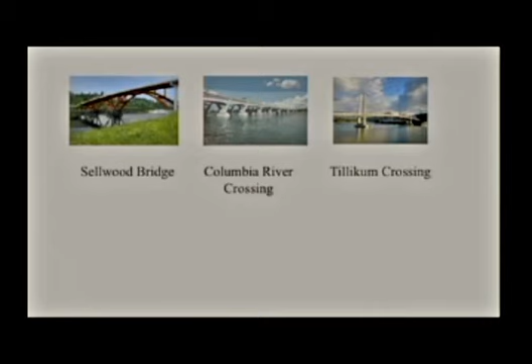The first and largest is the Columbia River Crossing. This was a study project initiated shortly before I took office on the Metro Council. Most of the references I'll make are to the final environmental impact statement, although this project went on so long and developed so many variants that you can find a variety of cost estimates or project descriptions. So I'll focus on the locally preferred alternative, or the LPA, and everything I say is documented one way or another in the voluminous library for the project.

What was the project? Well, contrary to the title Columbia River Crossing, it was actually a very long freeway widening project beginning in Vancouver, crossing the Columbia River, with major interchange improvements, a new bridge crossing of the North Portland Harbor, and light rail connecting from the northern terminus, the Yellow Line, into downtown Vancouver and crossing over to Clark College.

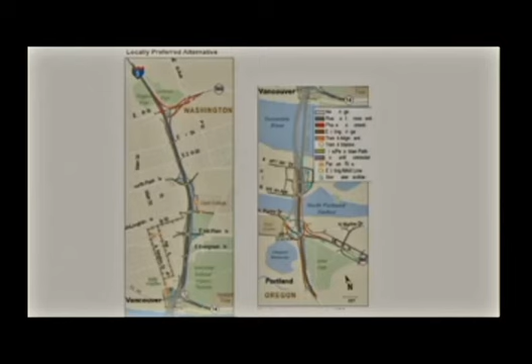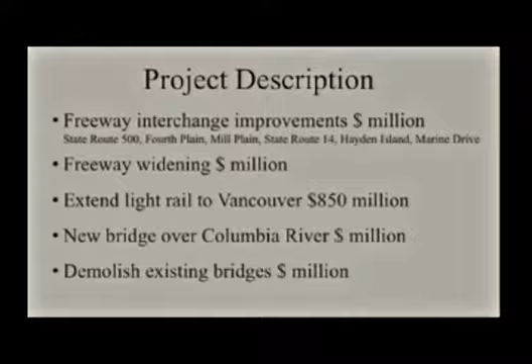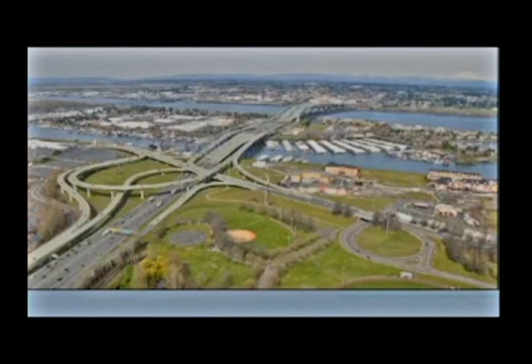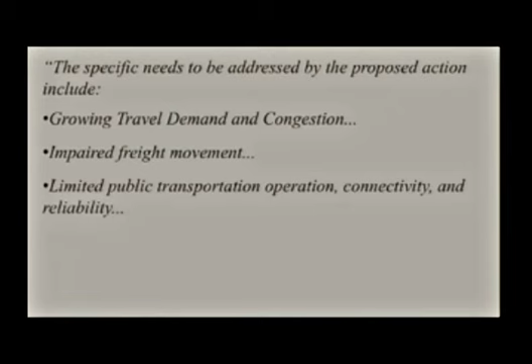Now, the purpose and needs statement is really the definition used for the project, and it frames the analysis, so it's very important. This is a quote: the specific needs to be addressed by the proposed action include growing travel demand and congestion, impaired freight movement, limited public transportation operation, connectivity, and reliability. One of the things you notice about these statements is they're really describing the same thing - congestion. So three different purposes are really all the same thing: safety and vulnerability to incidents, and substandard bicycle and pedestrian facilities.

Safety and vulnerability to incidents refers both to seismic vulnerability and accidents. But what's interesting about the purpose and need statement to me is it's all very generic. How many places in our region could you identify where these would be issues? Possibly hundreds.

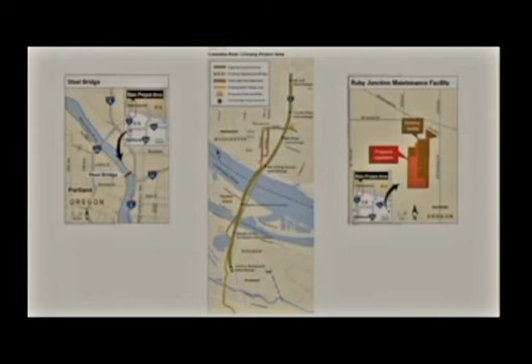So they're shown as a kind of parallel project areas. The larger area in this map is also very interesting. You see the Steel Bridge and Ruby Junction are called out because if light rail expansion requires improvements to these two locations. But what's not shown in any significant way is Interstate 205. So you have a project area that is very narrow, just 7 or 8 miles, and it doesn't show the freeway system.

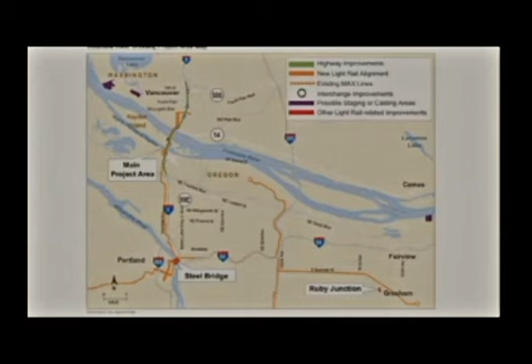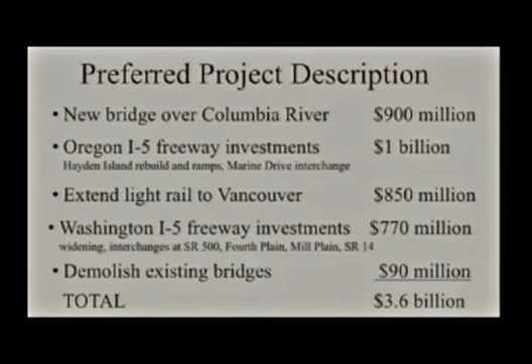There is the cost again by these segments. What's notable about this is it's called the Columbia River Crossing, but depending on how you calculate it, less than a third of the project is actually crossing the Columbia River, and it's only about 12% of the project length.

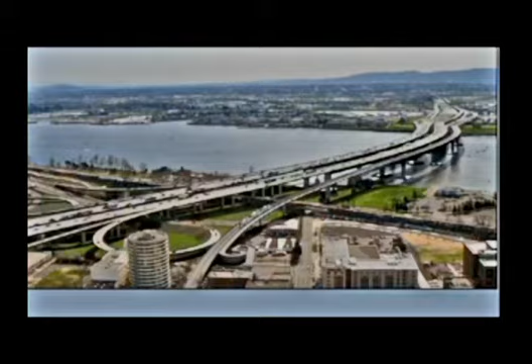Here are the images again, looking north, looking south, the preferred alternative. This is the finance plan, also very important, roughly a third each from different sources. The federal government is putting in $850 million for the light rail expansion, $400 million for highway improvements.

By the way, when I brought this up at a hearing with the city council in the city of Portland, someone argued with me on the city commission and said, well, that's your opinion of the finance plan. They can't even agree on how the project would be funded.

$1.2 billion from tolls, a very heavy lift, pardon the pun. $1 billion from Oregon and Washington, including some initial funding for the study, and then $150 million from other local sources.

So back to the purpose and needs statement. As I said, all very generic: seismic vulnerability, and so on. I'm going to talk about all of these except substandard bicycle and pedestrian facilities.

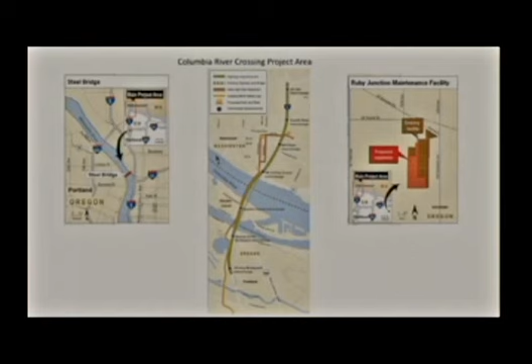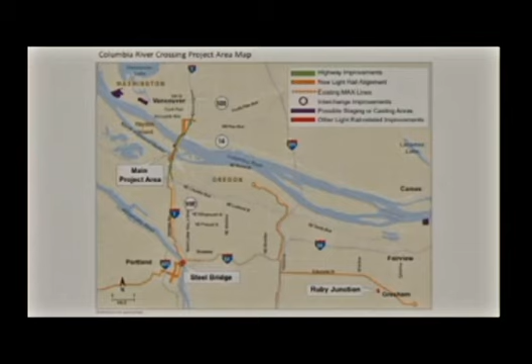We talked about the study area and the geography, which along with the purpose and need defines what's studied. So what's not included here is Interstate 205. The entire light rail section in this larger view is shown, but again the study area is only the several miles from SR 500 in Clark County, northern part of the city of Vancouver, down to just south of Marine Drive.

But what it doesn't show is that actually a lot of the traffic volume at the north never crosses the bridge. It originates from SR 14, just north of the Columbia River. So there's a lot of very local movement.

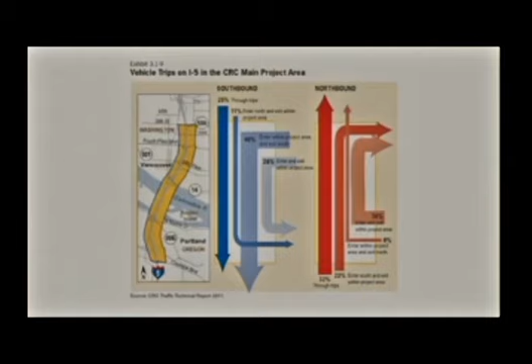Now this is interesting because the context is always an interstate freeway connecting Canada and Mexico. But it's very local traffic, and the images don't actually show here the fact that a lot of the volume of the traffic farther north, where there are massive investments in interchanges, is local and does not cross the bridge.

So one of the chief arguments is growing travel demand and congestion. This is a report by URS, I think now merged into AECOM, prepared for the city of Portland, and it talks about what the traffic will be like in 2020. 2030 was also used for some reports.

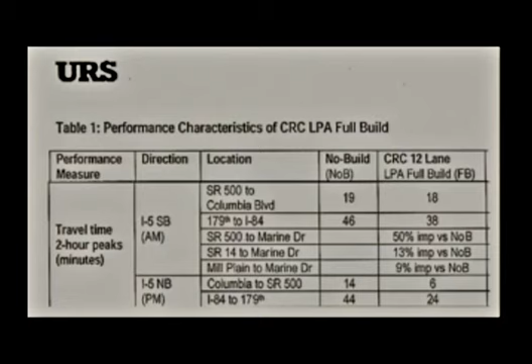And it compares the no-build versus the 12-lane option. Now, you notice it said 17 lanes on Hayden Island—all the exit and off ramps weren't considered lanes. In fact, we were told there's only 3 through lanes in each direction, but there were 17.

So here's the difference in 2020 between not building it and building it. This is the morning peak southbound: 1 minute. The northbound peak, the difference is 8 minutes. So we're talking about a $3.6 billion investment, at least $2.8 billion for freeways, in order to save 1 minute by 2020, or 8 minutes northbound.

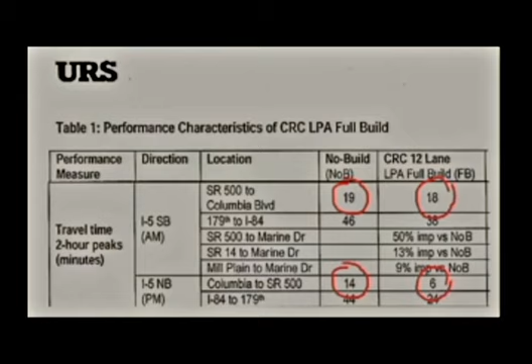Well, my first question is, what are other wastes of time? Why is 8 minutes or 1 minute so important? Let's say that's 9 minutes a day.

Well, here's an interesting statistic from the Bureau of Labor Statistics: Americans watch—by the way, this is very much lower than what the TV networks say—2.8 hours of television per day. The average amount of commercials is 16 minutes per hour, so in other words, if you watch television, you have about 42 minutes of commercials. So what if we bought TiVos for everybody and just cut out 8 minutes of commercials? Maybe that would be a lot cheaper.

The question is, what is 8 minutes of delay worth? I think the other question is, why is that congestion the most valuable? There's congestion everywhere—why spend that amount of money to save 8 minutes and 1 minute?

You don't ask that question when you have a small study area, because you're only looking within the study area. Another obvious point: the crossing was 12 lanes or 17 lanes or 6 lanes, very large. You saw the images. What is Interstate 5 near the Coliseum? 4 lanes. That's not in the study area, it's outside the study area.

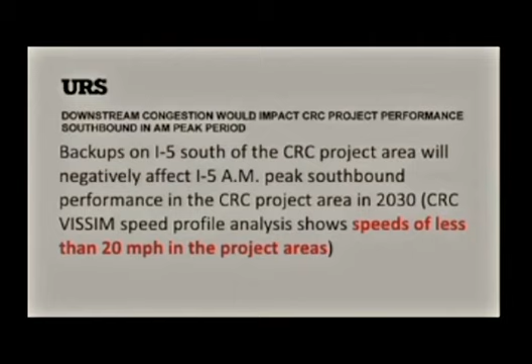So didn't analyze that. But of course, URS noted speeds of less than 20 miles an hour because you're taking a big pipe and putting it into a small pipe. So if you need to fix that, you have to fix the entire length of I-5 going through the I-84 intersection. It's not in the project area, not part of the project analysis.

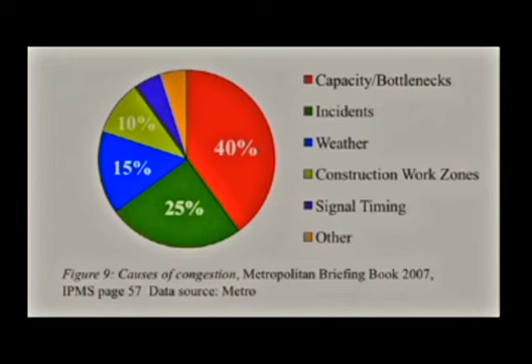Here's another obvious point. The project required $1.2 billion in tolls. By the way, the project descriptions at the beginning never described tolling as part of the project. That's a finance mechanism. Well, you all know tolling is demand management.

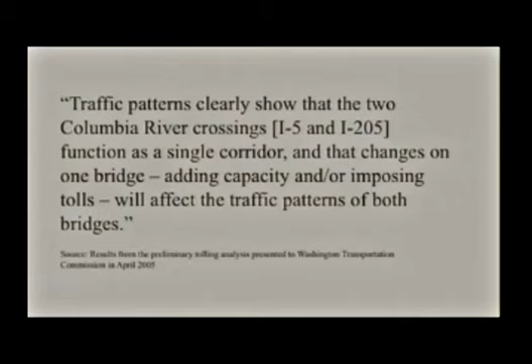So look at this result: massive diversion to Interstate 205, which is not in the project area and therefore not part of the project. But this is a statement of the obvious. I-205 and I-5 and these crossings are part of a network, part of the interstate system. So it's going to greatly affect travel movements if you toll one and not the other, which was the proposal. So what's the consequence?

So a big benefit for those commuters. But if it's tolled, the traffic volume on I-5 shrinks back to what it was in about 2004. And if you toll both, the total volume shrinks. That's called trip destruction - people choose not to make trips. What's interesting about this is the freeway is sized to handle this increased volume, but the tolling mechanism cuts down the traffic. So it's like widening the door and then installing a turnstile.

Why wouldn't you start by figuring out the effect of the tolls, then size the bridge according to that, and make the tolls part of your management system? Another big issue is freight movement.

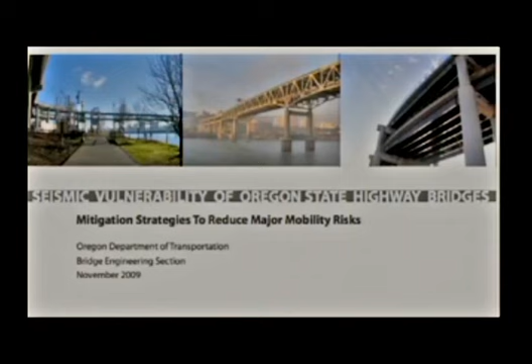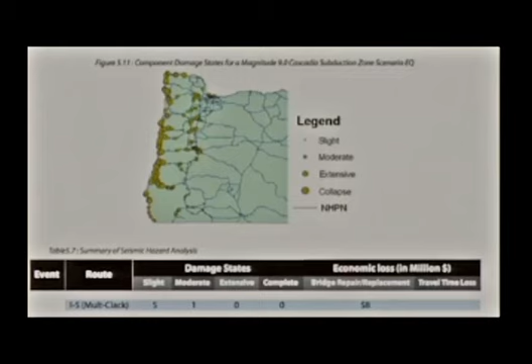They modeled another earthquake, which would be a 7.0, and a 6.5 located about 2 miles from us, right under the West Hills. That's bigger than anything we know about in the geologic record. And looked at it again, and there was a lot more damage. But you can see there's no collapse—I think there might be one collapse in that area.

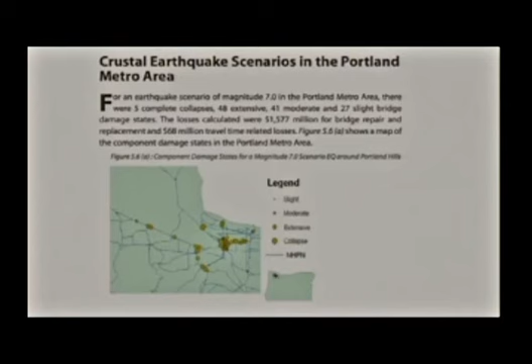This is the conclusion. So first, they're modeling these different earthquakes. CSZ stands for Cascadia Subduction Zone, in the north and south.

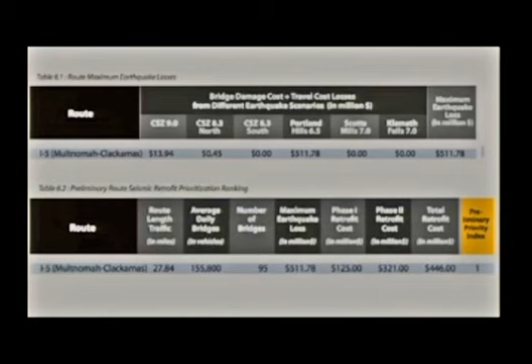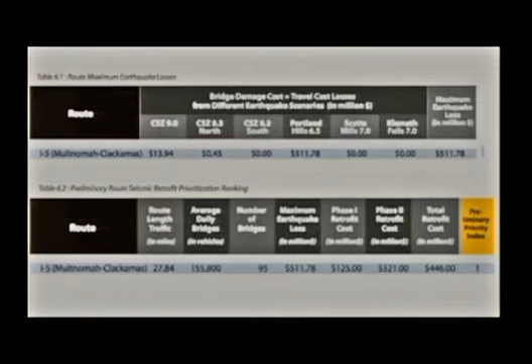There's 2,200 schools in Oregon that need seismic retrofit. I think it's a big question about whether you want to keep water running or automobiles running. So the question is, what is your priority? Given that there are many other bridges that would collapse, it's not even clear I-5 would be open, because the overpasses would fall.

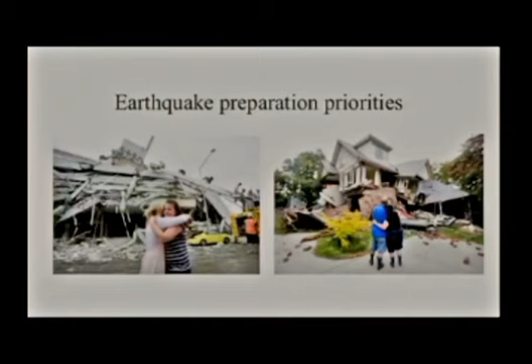But this is the big question: how are you going to spend your money? What is the actual risk?

Coming in and on and off, with very short entrance ramps, because the bridge was designed in the 1950s. So that's not a current standard, which is why they call it functionally obsolete—not structurally deficient, but there's not enough room to merge. So there's all these accidents there, hundreds of accidents, and that causes a lot of delay.

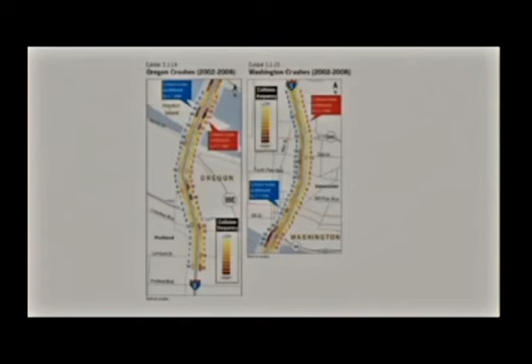In the project report itself, they note two classifications, HAL and HAC. There were no locations of severe accidents in this section. Why? Because the accidents occur during merging at rush hour, which means the cars are going 15 and 20 miles an hour. They're fender benders.

So what is the highest priority if you're concerned about accidents? This certainly has an effect on congestion. But if you're concerned about life-saving, you would look at another corridor, State Highway 82nd Avenue, about 10 miles from here to the east.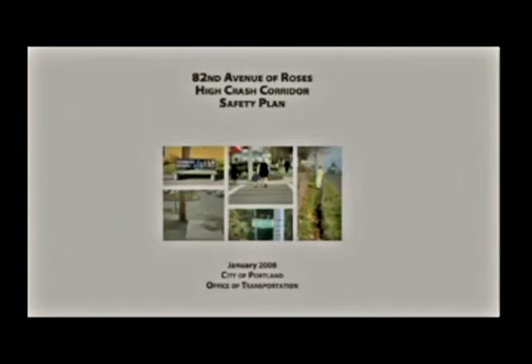There's a report from January 2008 about the 82nd Avenue Corridor of Roses. It's a 7.3-mile section of 82nd Avenue from northeast Killingsworth out by the airport down to the Clackamas County line. It carries a lot of transit and truck traffic, and it's mostly 4 lanes, 12-foot lanes.

Here's the crash data summary: 11 fatalities, 81 injuries of type A severity, 430 injuries of type B severity (non-incapacitating), 1,178 injuries of type C (pain), and 3,747 total reported crashes.

Well, if you want to deal with saving lives and reducing accidents, where would you do it? Over a river, or on 82nd Avenue, where you could affect a lot more benefits?

What about the alternatives that were done, and why did they come up with this alternative? This is a very important point for me: there was a set of criteria that were non-quantitative and based on values, which is fine, but they were used to screen a large number of alternatives before any analysis had been done of how the alternatives would function. So the alternatives were studied in the sense they talked about them, but they never actually conducted an analysis of what they would do. That is a very big problem, I think, in how we handle our analysis.

Here's an example of a different approach. This is our freeway network as of about 1990, and there's a proposal to continue to build the Outer Beltway—this is the Western Bypass.

I read this article by John Pucher at Rutgers, which has a title only planning students would love. But what he talked about was, why do Americans drive so much? Is it cultural or is it something else? His answer was Americans go to Europe and they don't drive there, so it's clearly not cultural. He looked at all the policies, and one of them was our land use patterns.

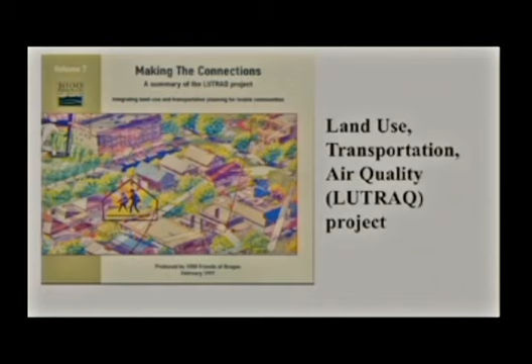I was involved with this project in developing this alternative, which was to model a different land use pattern so people wouldn't have to use cars on freeways. And I learned a lot from this.

One approach on the left here is a standard suburban approach of segregated uses and a dendritic system of roads, versus a grid with a lot of options of how to travel. So the LUTRAQ alternative said: we'll change land uses, we'll do demand management, we'll make investments in transit. The western part of the light rail system had not yet been built.

And if we combine those, what kind of results can we get? Well, it turns out this alternative outperformed the highway—in congestion relief, 53% congestion relief versus 4%, and in access to jobs. It greatly expanded the number of jobs within a 30-minute travel time. So more access to employment, lower congestion.

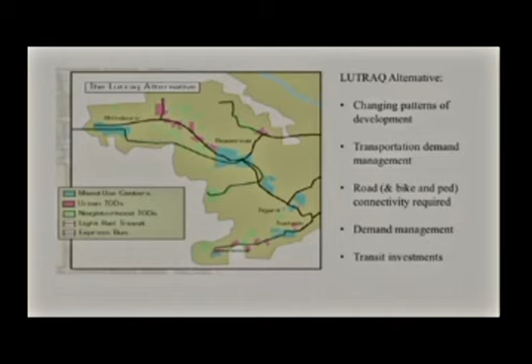And what was interesting about it is this alternative was adopted. So that western bypass was not built, and this became part of the basis for the scenario planning done at Metro.

What about other people wanting to get to work? There's 18,000 people a day on the number 4 bus. What would it cost to take 4 minutes off their travel time? None of those questions are asked. It was reduced to a very simple kind of analysis of air pollution impacts. What about the effect on reducing property values, not just next to the freeway, but when you create new access and new interchanges—commercial uses gravitate to those locations, emptying out another retail opportunity. Not discussed.

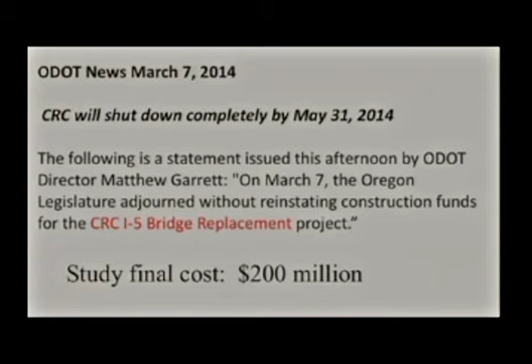And here's the end. After 10 years, shut down, terminated the whole project. Note, the project's called the CRC I-5 bridge replacement. So from beginning to end, it was called the bridge replacement, when that was actually only a third of the project. Cost of the study: $200 million, which would have been enough to actually do quite a bit of good.

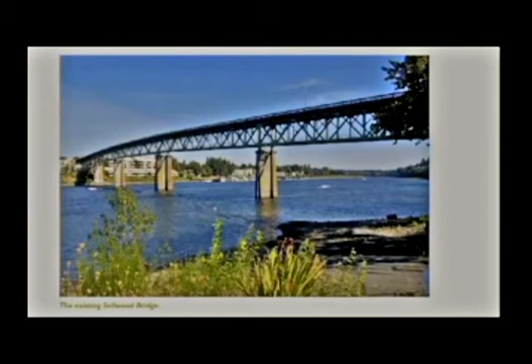Move on to the Sellwood Bridge. This is the bridge that's now under construction. This is the bridge that's being replaced. That bridge was built in 1925. It was a cheap contract, cheap design, and it had a lot of structural problems.

People said to me — I was on the Metro Council during this time, and I was actually on the policy advisory group for this project, but it's a county bridge — they said, I'm afraid to drive over it because I'm concerned it'll fall down.

Here's the context, by the way. So on the north end, you see downtown Portland, the south end, Lake Oswego, and the Sellwood Bridge is in the middle south of that island.

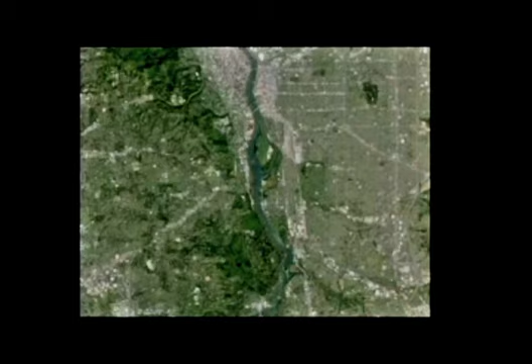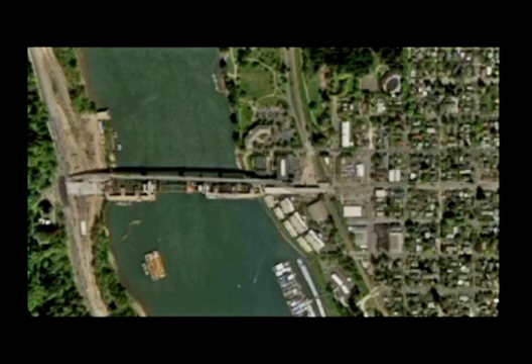This is a close-up, from Google Earth, showing some of the construction. You'll notice there's quite a bit of construction. You'll see a lot of construction on the west bank, the freeway.

Well, this is the road that approaches the bridge. It's called Tacoma Street, and it was the subject of a lot of planning by the citizens. The citizens said, we want to shrink it and make it a main street. And that's what happened, with a few turn lanes, and that was put into the regional plan as a main street.

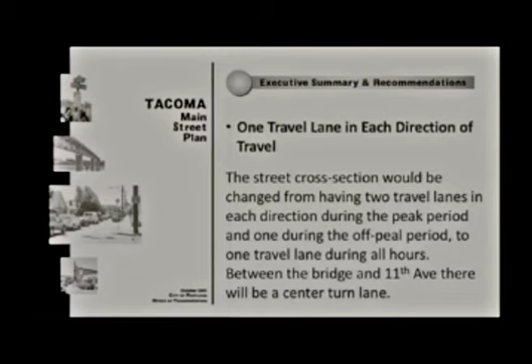So it's interesting that when the Sellwood project began, the problems identified included inadequate structural integrity — the bridge is old and not holding up well — unsafe road design, and the sidewalk was like this. I mean, I would never ride my bike on that. I always walked it over because it was very narrow.

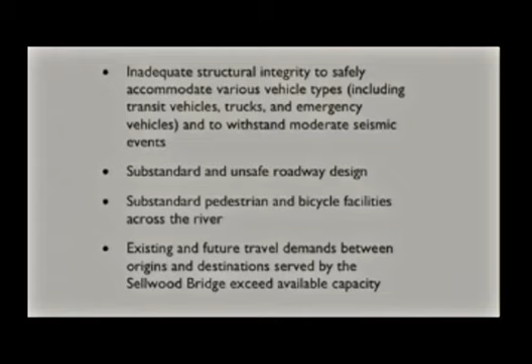But then it says existing and future travel demands between origins and destinations served by the Sellwood Bridge exceed available capacity. But wait a minute, Tacoma Street is not going to be expanded. And actually the committee agreed in their direction: no, we're not going to expand Tacoma Street.

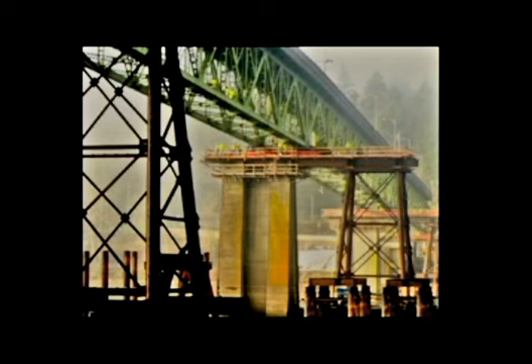But the first thing that struck me after the project was approved was that the bridge that no one wanted to travel on, because it was going to fall down, was actually moved and put on temporary piers. There's actually people who said, no, the bridge is not great, but it's not in terrible shape. The problem is the west approach, where the West Hills are moving east and crumpling up the bridge approach. But if the bridge was so dangerous, why would you move it and put it on wooden pilings and use it as a temporary bridge?

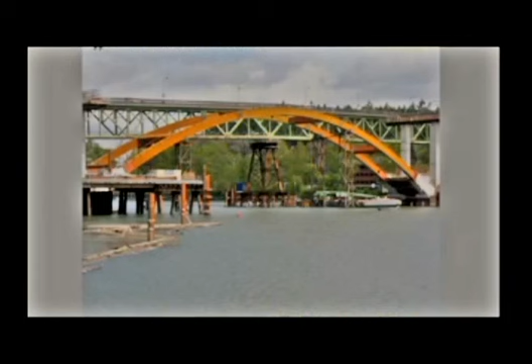Because they're overwhelmed with material and they're actually directed by the consultants. In fact, when I first served on the Policy Advisory Committee, when they said we want it seismically safe, I asked this question: what do you mean seismically safe? Now you know what I mean by asking that question. This is what the consultant said: 'Councilor Liberty, seismic means earthquake, so it means safe in an earthquake.'

Right, I kept my cool, but I realized that was kind of the approach, which was to manage the policymakers and to keep things moving along the direction that was, I think, favored from the beginning.

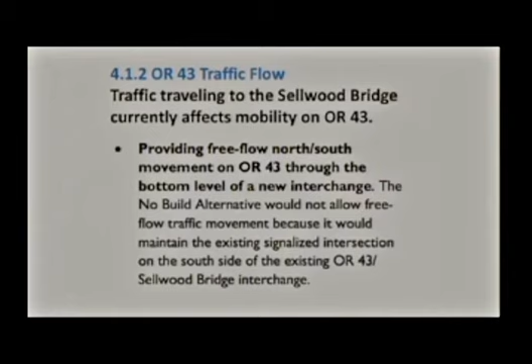The other thing that was interesting was, where did this come from? This is now used to screen the alternatives: providing free-flow north-south movement on Oregon 43, the road to Lake Oswego, through the bottom level of a new interchange. The no-build alternative would not allow free-flow traffic movement because it would maintain the existing signalized intersection. Where did that come from? I thought this was about a defective bridge. Now it's about travel time to Lake Oswego for people who don't cross the bridge.

This is what became the locally preferred alternative, the interchange on the west side. That costs $113 million. So that has nothing to do with getting back and forth on the Sellwood Bridge. That has to do with going to Lake Oswego by people who don't use the bridge. And there's the bridge under construction.

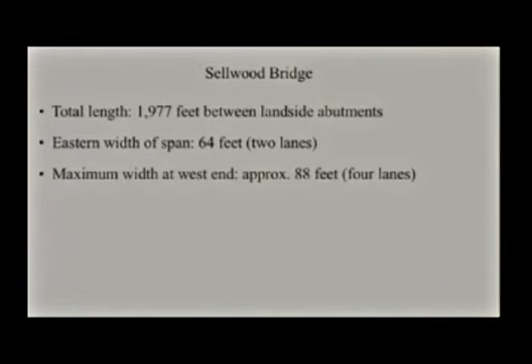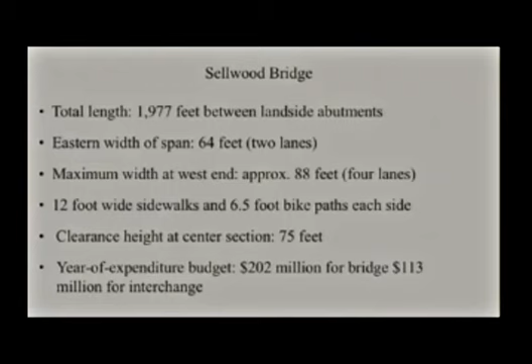So the project's now $315 million. Take a look at those numbers because that's going to be important at the final discussion of the Tillicum, and this was in the final environmental impact statement: funding sources for any of the build alternatives, not resolved. So we went through the whole process, and I asked at the beginning, how much money will it take and what's the money available? And they said, we're not going to deal with that now.

To me, that seemed irresponsible. And I made a motion that the consultants come back with an alternative of, I think I said, under $100 million, no matter what it was, so the county that could make the decision could choose from a cheaper versus a more expensive alternative. But the county was given a choice between $301 and $350 million. So it was not possible to make the consultants actually come up with a less costly alternative to consider, and it turned out to be a big political mess because the people who were using the bridge didn't pay for it. The last bridge, Tillicum Crossing.

I'm glad to say that this project I supported. That's the resolution endorsing what was a much larger project, a 7.3-mile light rail extension to Milwaukie. It had been in gestation for about 15 or 20 years, with 10 stations and 1 reserved and a new bridge. There's the image of the bridge, and there's the bridge. So remarkably similar.

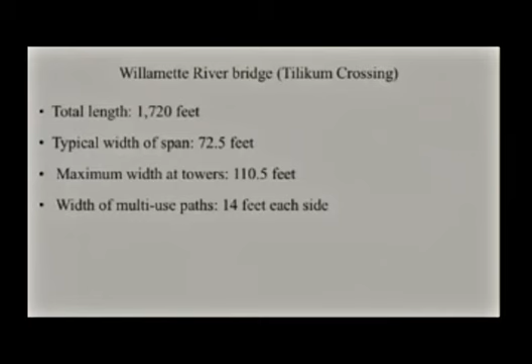Now take a look at these numbers. 1720 versus about 1920 for the Sellwood. 72.5 feet wide versus 64 to 88 for the Sellwood. Width of towers, 110. Width of multi-use paths, 14 feet each side. 77.52 feet, so slightly higher, but virtually the same as the Sellwood Bridge. Cost $126 million. So this bridge costs two-thirds of the cost of a bridge of very similar dimensions.

This is an agency known for getting projects on time and under budget. And the other interesting thing about this is a story in which I don't look so great, because there was a committee created to deal with bridge aesthetics, and I opposed that because I was concerned about the total project cost. And they brought designers, architects, and engineers together, and the result was the design you see now, which was cheaper and safer. That is great project management.

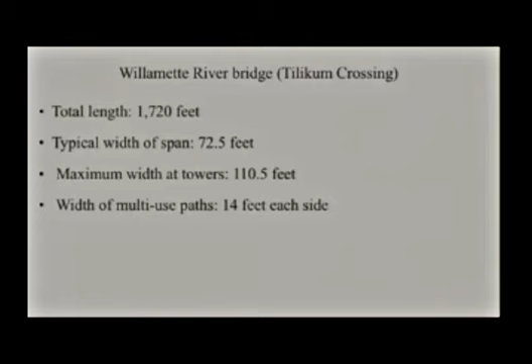So, now to wrap up, what would I do to change these systems? One is I would have more specific purposes, numeric goals. Our goal is to reduce congestion by 15% by the year 2030, or reduce traffic deaths from 82 to 15, or reduce greenhouse gases by 15%, or give people, add 500,000 more job access to at least 100,000 more people.

As compared to what? Compared to what? How much money spent on this versus spent on another project? Compared to other projects, compared to other ways of achieving the same objective. Allow policymakers to make policy decisions. Now, the truth is a lot of elected officials actually don't want to make decisions. I know that sounds shocking, but they want to be elected officials. But there are a bunch of them who feel it's their duty to make decisions, and they need to have actually a process that allows them to make the policy calls.

Funding trade-offs. Again, compared to what is also about cost. If we spend money on this, we are not going to have money for that. That question is never discussed. It's amazing. There's a limited amount of money. If we spend it all on this, these projects go away. Why don't we compare those projects to see which ones achieve more of our objectives?

There's a bias to building things as opposed to things like demand management or incentives or changing land use. And that's because the consultants are often involved with firms that design and do design-build, so they're interested in building something big. Plus, psychologically it's more gratifying to say, I built this new bridge, than to say I instituted signal optimization.